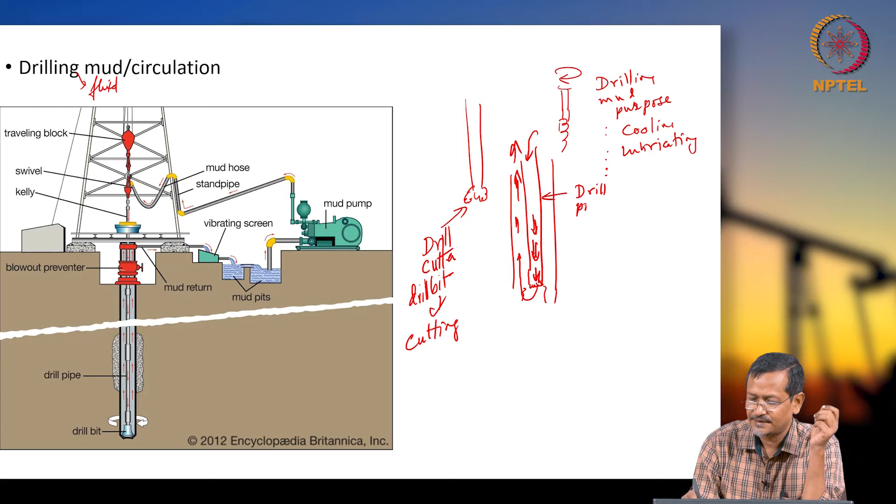So the drilling mud you are pumping through the drill pipe will be moving up through the annular area. This is the drill pipe, and the space between the drill pipe and the hole is called the annular area. So mud will be moving up through the annular area.

When mud is moving up, it will take all the cuttings with it, the small rock particles created during drilling, moving them up using the drill mud. This is called drill cutting removal.

Another task is hydrostatic pressure. What is hydrostatic pressure? When you are cutting the wellbore, let us say surface rock is there, then a formation zone, and pressure is very high at the formation zone. When you reach it, high pressure fluid is there, and this high pressure fluid will try to move towards the drill pipe and annular area. If you do not control that high pressure fluid from the wellbore coming to the surface through the annular or drill pipe, an accident can happen.

So to prevent that, you change the drilling mud density such that whatever pressure is there in the wellbore reservoir, you create more pressure, or almost equal pressure, so that the reservoir pressure will not force fluid to go up. So drill mud will control this entire flow phenomenon.

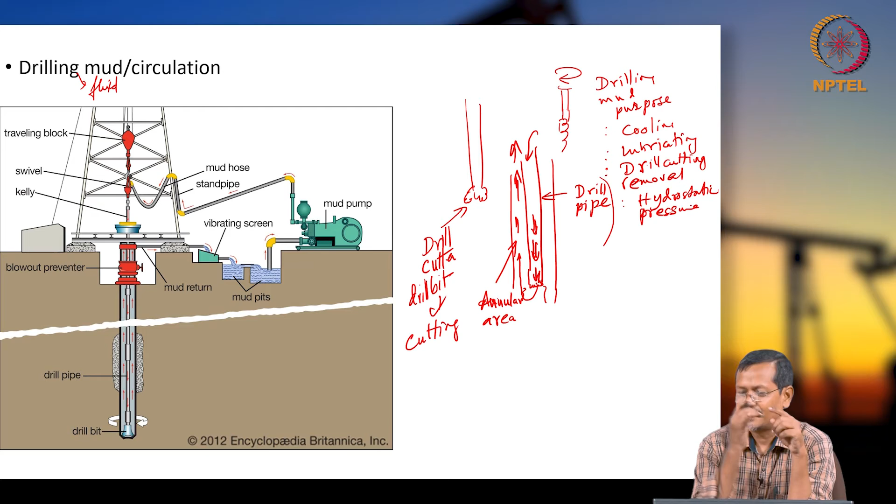So in that case you are maintaining hydrostatic pressure, doing drill cutting removal, doing cooling work, doing lubricating, and there are some other purposes too, for example cake formation and other things, which we will not discuss in detail.

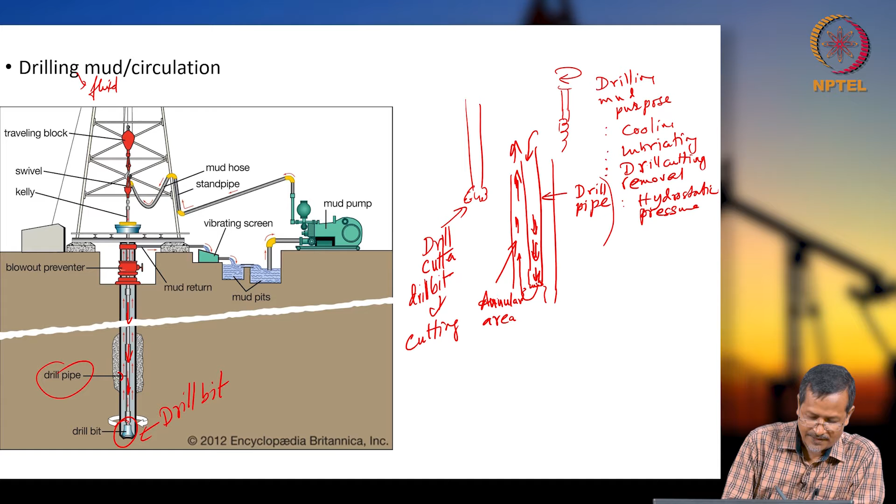So you see the left side picture I have taken from Encyclopedia Britannica. Here the drill cutter is here, the drill bit is here, and fluid is coming through this, as shown by the arrow. This is the drill pipe, and fluid is moving up through the annular area. Where does the fluid come from? You see one pump here, on the right side, the mud pump. The mud pump will be pumping drilling mud at very high velocity or high pressure.

The mud pump normally will be reciprocating, because very high pressure has to be created. So normally it will be a multi-cylinder reciprocating pump, maybe duplex, triplex, or quadruplex, which will create very high pressure. Later I will discuss why not a centrifugal or axial pump, why a reciprocating pump. Reciprocating pumps can create very high pressure.

So the high pressure pump delivers high pressure fluid through the mud hose, then it goes through the drill pipe. The Kelly is the top section of the drill pipe, one conduit or pipe called the Kelly, the top section. It rotates continuously, and the Kelly is connected to your drill pipe. So fluid is going through this.

Okay, then when returning, fluid goes directly to the shale shaker. This vibrating screen is called the shale shaker. It continuously vibrates.

Whenever drill mud comes back, it has lots of rocks. This shale shaker or vibrating screen has lots of pores. When you continuously shake it like this, sand particles or bigger particles stay on top of the shaker or screen, and liquid falls down. You separate the cuttings on top, which you handle separately, and put the liquid in the mud pit.

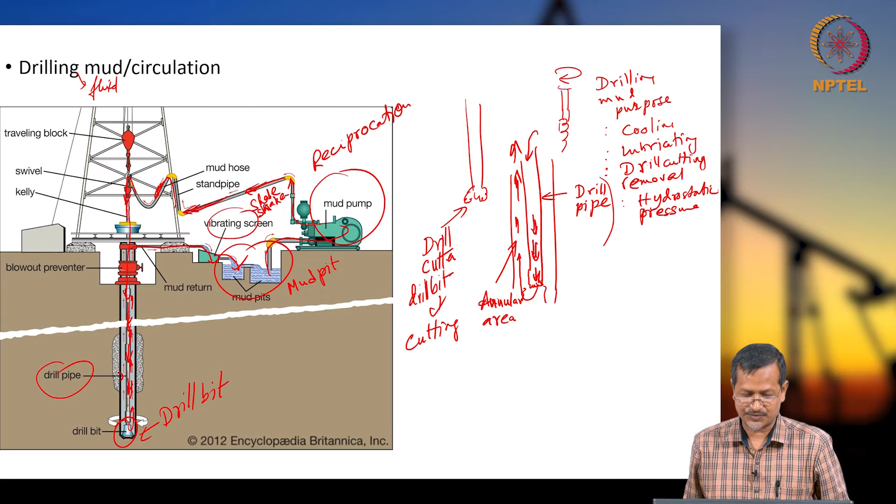We are not discussing that in details here because our focus is different for this course, and all topics are different. For someone learning first time, they should understand terms like drill cutting, mud, and all these terms. If you are not a petroleum engineer, you have to go through Wikipedia or other sources and be familiar with the terms.

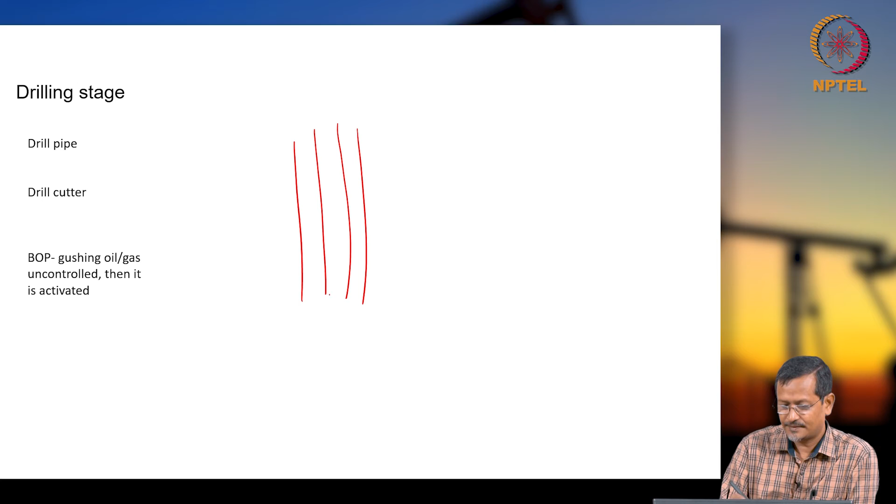So, drilling stage. In the previous slide you have seen we have wellbore and drill pipe, and you have the cutter. This is drill pipe, and this is your rock actually, you already removed material from here.

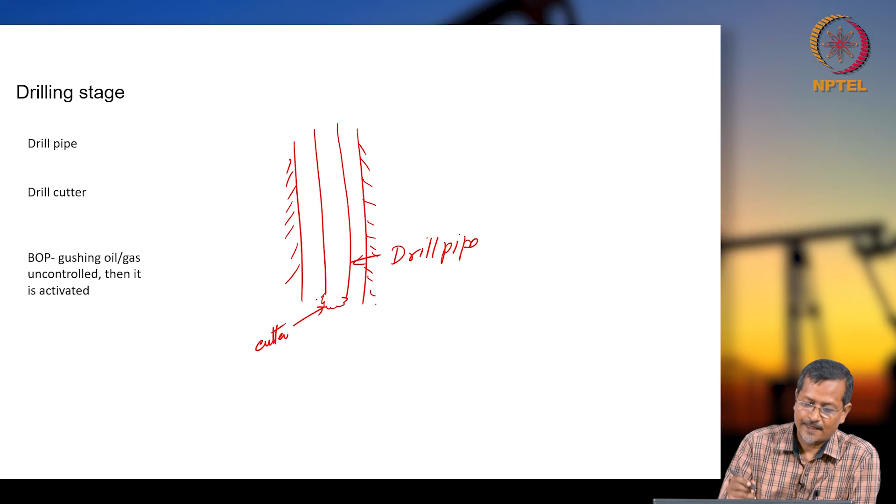Now you must have one wellhead. During drilling operation you can have one wellhead. The wellhead will allow accessing your wellbore, putting your tubing, everything, but at that time your Christmas tree may not be there. And there you will also have one BOP.

What is BOP? Or blowout preventer, blowout preventer.

So what does a blowout preventer do? Say you are drilling and suddenly you get one area with very high pressure, maybe having gas. If you have cap rock, when you are drilling first time, the cap rock top portion may have gas accumulated. So you suddenly drill and get very high pressure gas.

So what will the high pressure gas do? It will try to move up, maybe through your drill pipe or through the annular area, and if suddenly you get that much high pressure, that is called a kick.

If the driller or the engineers working find some kick is there, suddenly pressure is getting changed, so what will they do? They will change their drilling fluid density or other parameters so that they can control the kick and continue drilling. But in some cases that is not possible to control.

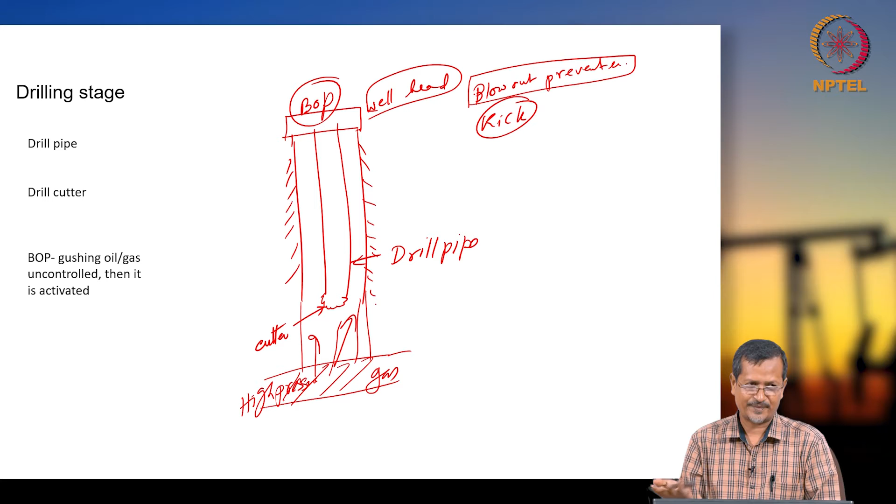When you are working offshore, your life is also linked with that, you cannot run away. You are working on a semi-submersible platform and you cannot think some other engineers will be working while I sleep for today, that is not possible, your life is also linked there.

So all engineers were involved, they started working, but finally 11 engineers died immediately, I think. Then after that, British Petroleum and other organizations handled it, and I think they are getting production now.

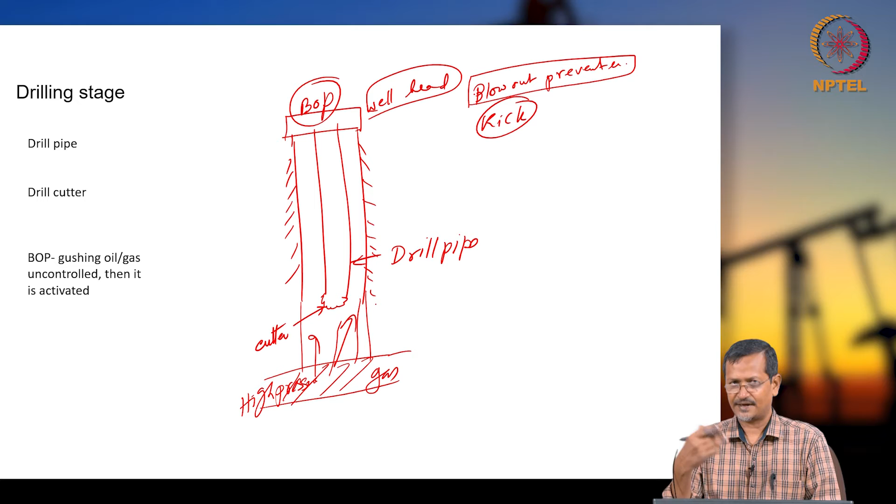So the blowout preventer will be activated when drillers are unable to control the kick.

When you are drilling a hole, it can be completely vertical. Your life is easier if you have a land well and you are drilling completely vertical, so life is beautiful, you do not have any tension. But in many cases you will not get sufficient production.

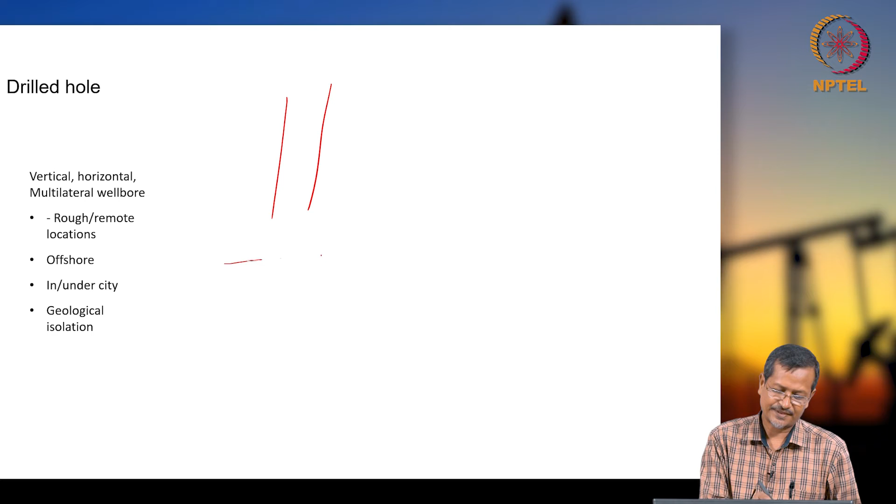Let's say you have a very thin layer of formation area and you want more production. A thin area means your wellbore connectivity with the reservoir is only this one. But if you want more production, a smart engineer will make a horizontal hole like this.

So their connectivity between wellbore and reservoir will be more, longer connectivity possible, so they will get more production. So to increase production, they will go horizontal. In some cases, they will go for multilateral wellbore. What is multilateral? You drill a vertical wellbore, then you make branches.

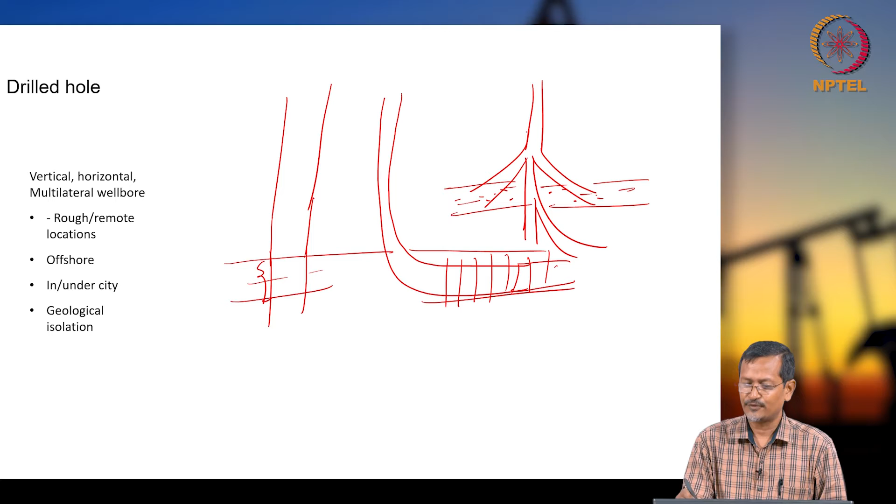Some can go horizontal, some can be vertical, some anything. Many options possible. Why? Let us say you have one formation area here, and you want to get some production, but you found further deeper there is another formation area. You have to get production from there. So you can get one production here, another production here.

Again, think like offshore area, you cannot drill many wellbores in offshore area. One platform is there, like a huge expensive platform you have built. You should go multilateral, and you can access many reservoir areas, many formation areas, and you can get more production. In some areas accessibility is one issue.

So in that case you can go horizontal, you can create S-shaped wellbore, you can create other shapes of wellbore also. For example, rough or remote locations where accessibility is difficult, desert area may be there, or forestry area, or ocean area, offshore area. So one platform is there, you cannot buy many platforms because it is very huge and expensive. So you create only one platform and you try to access all the nearby reservoir area.

In an undercity, for example, IIT Madras will not allow you to drill here. So you have to go maybe Marina Beach or somewhere else, then you drill there and access. IIT Madras will not know also. But if it is coal, normally you have to inform IIT Madras, they will have to vacate, because coal means you have to remove the material. In oil and gas, normally you are not removing the material, only liquid you are moving.

Geological isolation, some fault is there, so you have to check that fault area and you have to drill accordingly. So the wellbore shapes can be like this: completely vertical. You create vertical wellbore, you perforate here. Maybe it will be a slanted wellbore, based on your reservoir condition, productivity, your target. So Bombay High initially drilled vertical wellbores, later they went horizontal also to get more production.

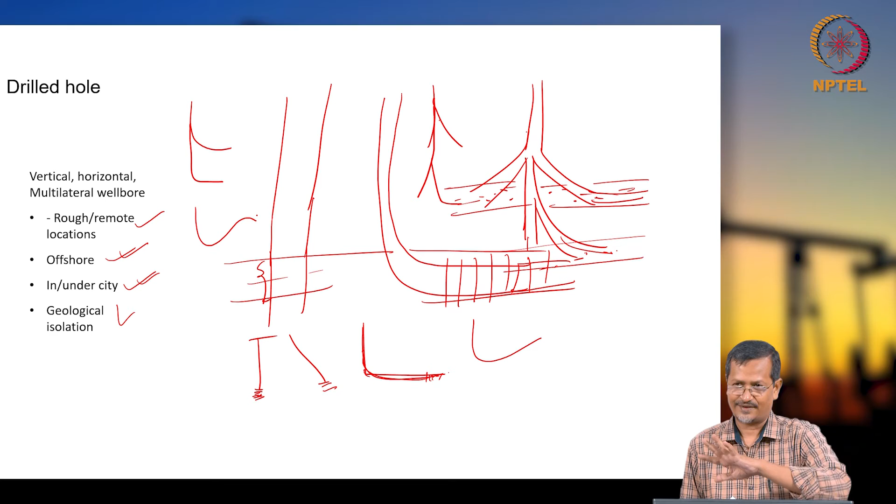Casing and cementing. When you are going for drilling, first you drill a very wide hole, then you put one casing, that is called conductor pipe or conductor casing. Many people will say conductor pipe or conductor casing. Then you cement it. So I am hashing this one, this means this is cemented area. Then you put another casing, this is called surface casing.

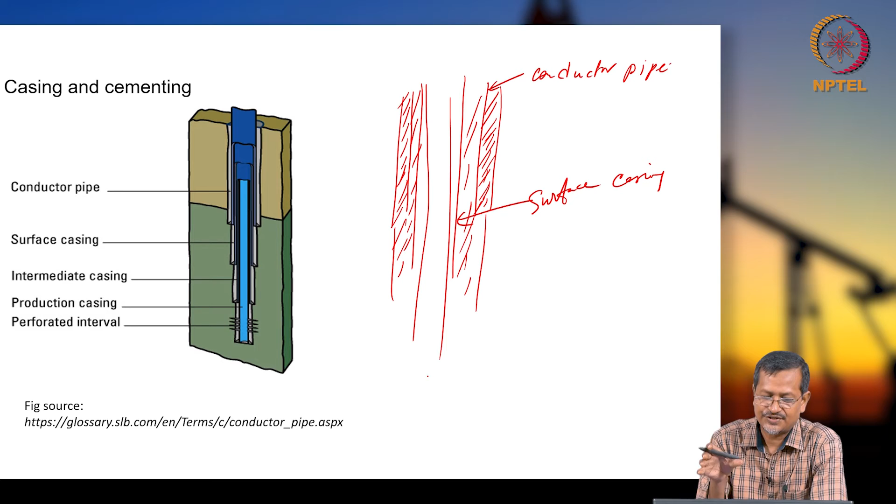Again you cement. This is called surface casing. And then again you put another casing, so gradually you are reducing the diameter, you are making everything safe. Initially you drill a few feet, you put conductor casing.

Then after that you drill a little bit more, maybe 200 feet or something, then you put one surface casing. When you are putting surface casing, actually you are preventing oil and gas from invading into your aquifer zone, where drinking water will be there or trees will be surviving there. So you cannot allow oil and gas to go there, that is why you are putting surface casing. Surface casing again you cement, then there will be another casing. So several stages of safety you are putting near the surface area. Then you are putting intermediate casing, after intermediate, again another casing, there is a final casing, that will be called production casing.

So that one you can perforate, this is called production casing. Conductor casing or conductor pipe will have a larger diameter, like maybe 36 inches. When it gets to production casing, it will be like 5 inch, 5.5 inch, so that range. So you can see gradually it will be reducing one by one.

The purpose of conductor casing is that it prevents unconsolidated sediments from entering into the bore. And surface casing protects the freshwater zone, which you cannot contaminate during production or any other stage. It will also be attached to the BOP during drilling operations, and it gives structural integrity, connecting to other types of casing.

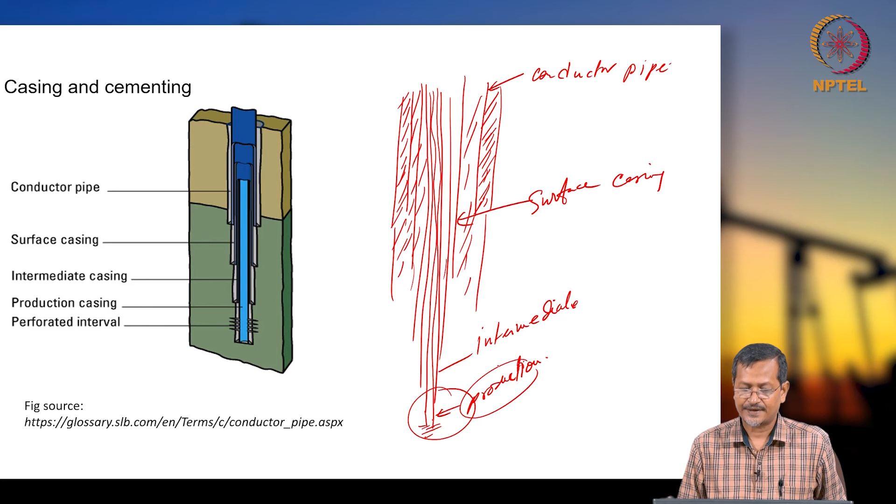Intermediate casing will be very long; its function is only to support. So wellbore completion happens once drilling is done. When completing, you will be cementing, then perforating, then fracking - hydrofracking and acid fracking will be there.

In some cases you will also be putting an artificial lifting mechanism, which is also part of the completion process. Many big companies have a separate team of completion engineers, but very small companies only have drilling people who do all the jobs.

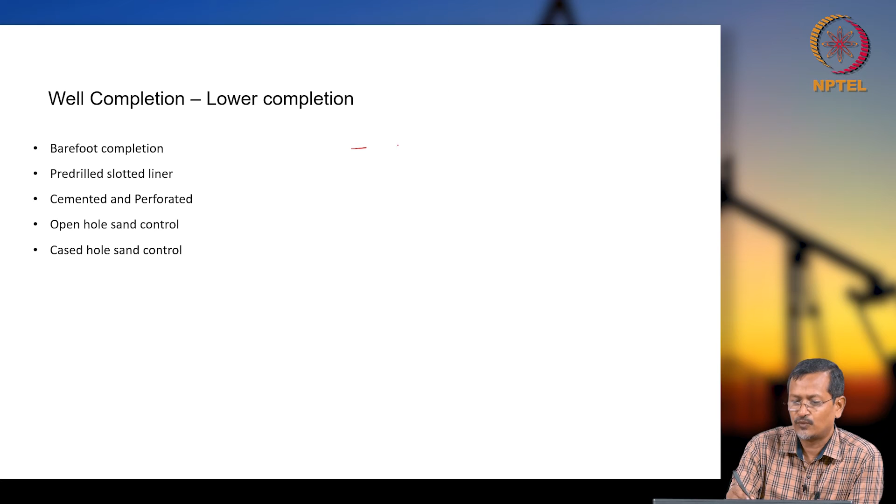When going for completion, there are two types: lower completion and upper completion. Lower completion is like the drilled hole itself, and upper completion includes things like the wellhead, Christmas tree, and you will also have a choke. Those are part of upper completions.

Lower completion involves creating sand control here - sand control mechanisms, perforation will be there, and putting other mechanical arrangements will be there.

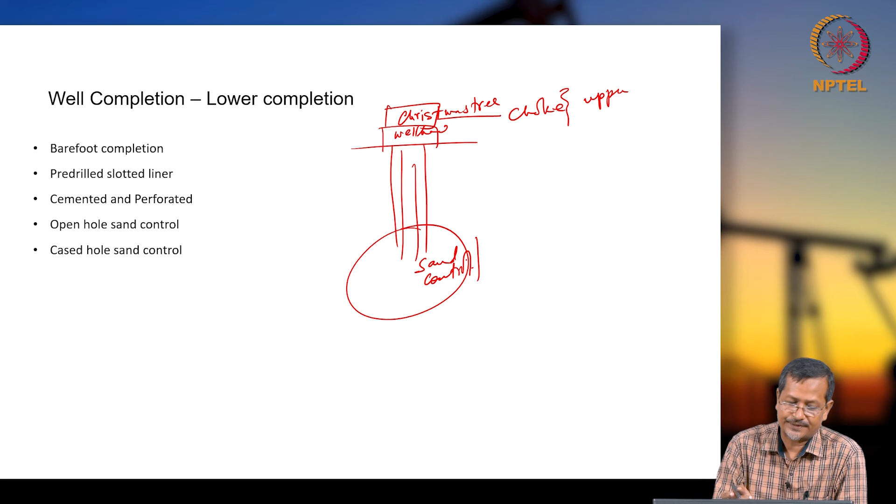Whenever you go for lower completion, there's barefoot completion, like when you have consolidated sand. In that case you may not put any casing at all - without casing you can still get production, and that is called barefoot completion.

In some cases, a pre-drilled slotted liner is used. You have a wellbore, and you put in a pipe with lots of slots - pipes with lots of small holes. This is called a pre-drilled slotted liner. That's barefoot completion versus pre-drilled slotted liner.

Cemented and perforated: in many cases you have a wellbore and a casing, and you put cement in. Unconsolidated sand may be there, so the cement prevents sand from entering the wellbore. Then you perforate, making long holes - this is called cemented and perforated.

So you put casing or pipe - sometimes called drill pipe, casing, actually a metal pipe, and tubing is also a metal pipe. The oil and gas industry uses specific terms that can sound odd, for example rat hole, mouse hole, monkey board. Lots of terms exist, and if you read about them you'll get the idea.

Here too, casing means a metal pipe, tubing is also a metal pipe, and the Kelly and drill pipe are also metal pipes. So casing is metal pipe - you drill a hole, put in the metal pipe, and put cement all around it, so that the pipe will not move and there will be no leakage.

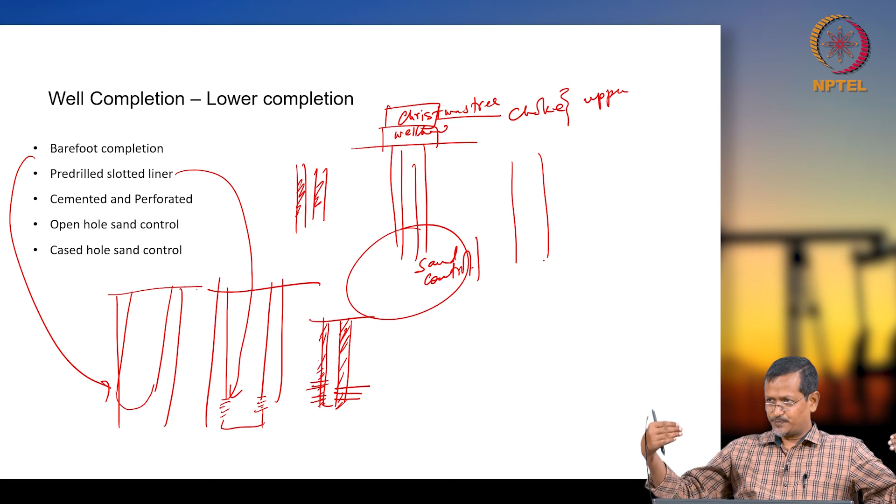Another option is the open hole sand control system. Why sand control? Say you have a reservoir, you drill a hole, and you put in tubing or casing. Whenever you get oil and gas production, some small sand particles can also come into the wellbore. If a large amount of sand comes in, that's a problem - it will block everything.

You have one pipe, and sand is also coming. Sand has higher density than water, gas or oil, so it gets accumulated at the bottom. When it accumulates, it slowly blocks the path, and when it blocks, fluid like oil or gas will not enter into the wellbore and will not go up.

Reservoir pressure is sometimes very high, pushing oil and gas, creating natural flow so fluid automatically comes to the surface. But in many cases reservoir pressure may not be sufficient. In that case, you may need extra energy from an artificial lifting mechanism or EOR, enhanced oil recovery technique, to increase reservoir pressure or fluid pressure so it can reach the surface.

And in a reservoir, if there is a lot of sand, you have to control it there, otherwise sand will come, block your path, or sometimes erode the metal pipes.

If hydrogen sulfide, H2S, is there with water, it creates acid, H2SO3, H2SO4. It is acidic gas, called sour gas. If H2S is there along with sand, corrosion and erosion occur together, and the whole metal production system gets hampered.

So you have to avoid sand, and avoid H2S, but if H2S is coming you cannot do anything about that directly. You have to handle it by selecting proper material properties and designing the system so it remains stable for a longer duration without leaking or other problems.

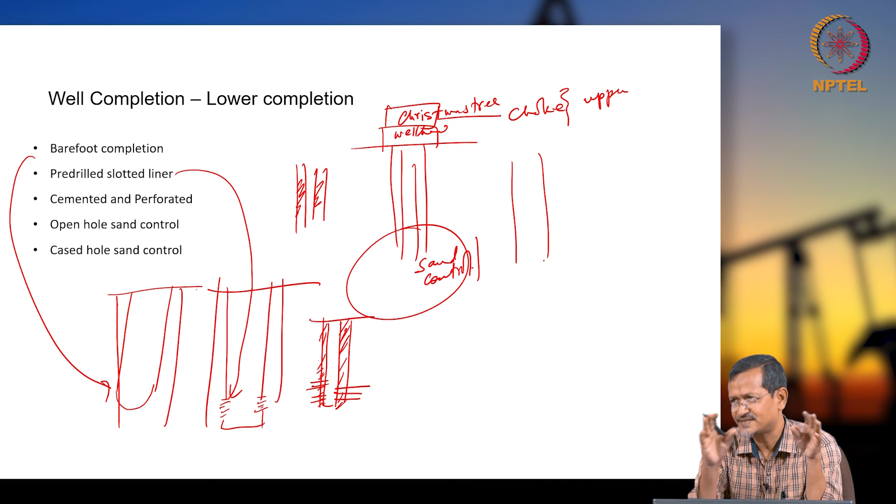There is no ideal sand control mechanism. If you want to prevent all sand, that means you have to stop the whole production, because there will always be sand particles coming with whatever liquid, water, oil, or gas you get.

Water comes freely, and over a wellbore's life it will produce more water than any other fluid. Sand will also come, based on your consolidation and your sand control equipment.

If you put very good sand control equipment, you are reducing your productivity. That means you have to make the mesh size very small, so your fluid will also get resistance along with the sand, and your productivity will go down.

But if you want more production, many engineers will try to allow sand and say we will handle it on the surface. Some engineers are confident enough to do that sort of work, but not all engineers can do that.

As a production engineer, you have to give maximum productivity because ultimately it is about money. Your company boss will ask how much money you are generating, and if you say the separator keeps getting blocked because of sanding,

then they will replace the engineer, because the company is paying a high salary and constantly replacing the separator system is not good. So you have to optimize how much sand control equipment to put and how much sand you can accept, so productivity stays stable and the company benefits more.